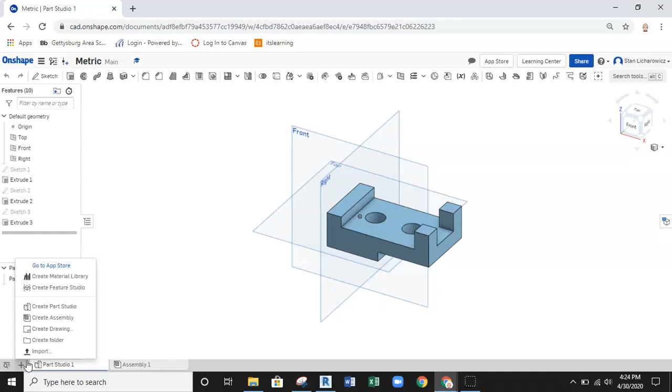All right, in this video we're going to discuss how to take this metric part and lay it out in a drawing. So what we're going to do is select the little plus symbol down in the bottom left hand corner and come up to create a drawing.

Now looking at these options, I'm going to go to ANSI drawings, and this says inch. We're generally running in inches. I could go to the ISO templates, but we're not finding any in here, so we're going to go back to ANSI, select the ANSI drawing, and say OK. Once we get into that ANSI inch drawing, I'll show you guys how to change the unit settings so you can have dimensions set up in millimeters.

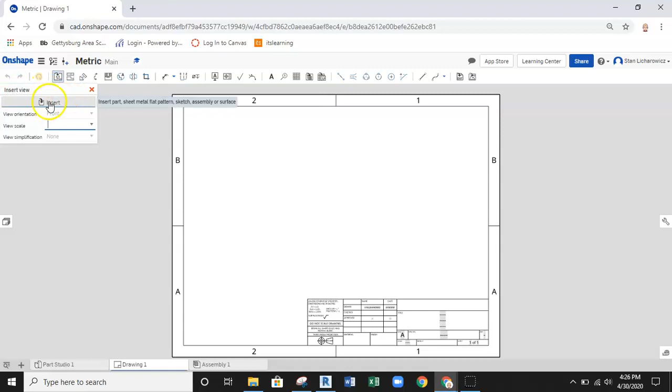Once that opens up, we need to actually get parts onto this drawing sheet. So with this setup, we'll say select part or assembly. If for some reason that disappears and it's not there, say you're on a new sheet, you can click this button, Insert View. Then it comes up to the Insert View dialog, we hit Insert View, and we can come up and find our parts.

Now, what I'm finding is that the easiest way to handle this is to create a single sheet per each drawing, and then submit PDFs or try to bind PDFs later with a PDF writer, and/or submit individual drawings. For now, at least, as I learned OnShape, and you learned OnShape as well.

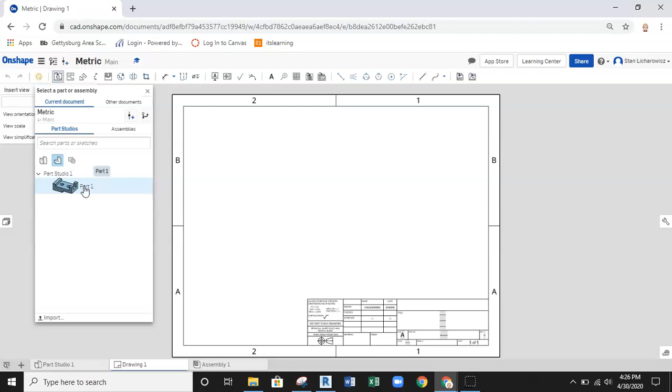So for now, we're going to go ahead and select our part. Right now it's set scale 1 to 2, and we actually want that to change. We want that to be 1 to 1. So we'll go into here and set this up because we want to go largest scale possible without losing detail off the pages, while still giving room for dimensions.

So we go ahead and set up these two views, that's going to be my front and my top. And then it's already set up here on my projected view, so I'm going to project from the front over to my right side view, and I have the 3 views that I need.

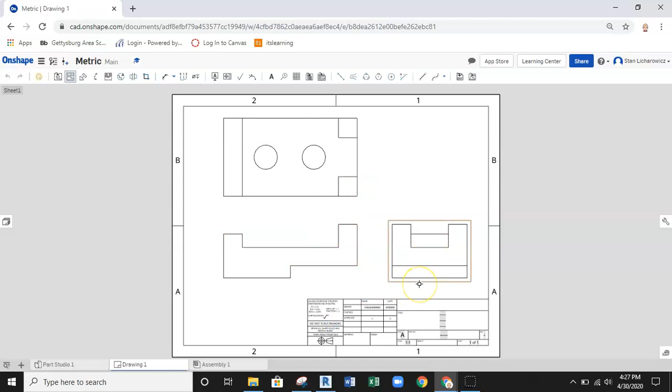Now, maybe it's me, but I like to open back up my sheets over here so I can see my part, my front, and my top, and my right being projected from that. Maybe that's just coming from Inventor and seeing my browser.

Next thing I'm looking at is I need to go ahead and turn on my hidden lines. Those have not been turned on. So I'm going to select the front view, and right click on that front view. Whoops, not sure what's happening. I'm going to hit escape here to finish that up. I guess I was still projecting. So hit escape to get out of commands, then right click on front view.

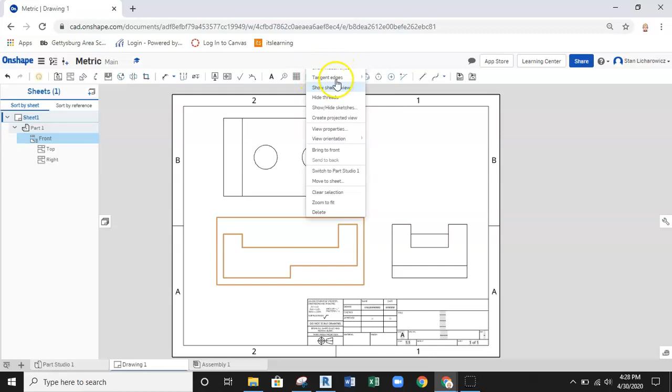Notice here this runs off the page. This at the top actually says show hidden lines, it's above tangent. So what I'm going to do is see if I can get this to happen again.

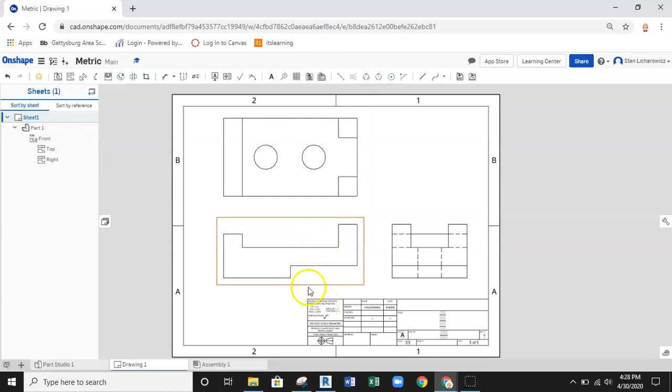If I right click on the right side view here, now you can see where show hidden lines is located. And if I select it, we should start to see hidden lines pop up. There they are. So just be aware that depending on where you are selecting, the right click option may not be seen, it might run up off the page. It's just something I figured out. So I go ahead and hit show hidden lines here. Same thing, show hidden lines. Now that came down and was able to select the hidden line. So that's set up, that's good.

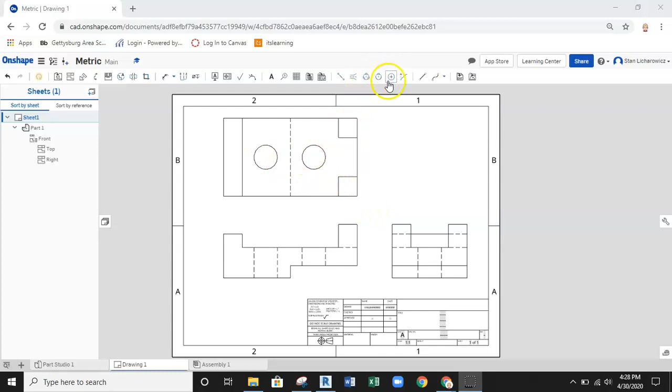So the next thing we need to do is add center marks. One of the other things I found out with the center mark tool is when you drop a center mark on the outside edge of a circle, you can see it only makes this small little center mark. Now, unfortunately, the other thing I found was there's no way to extend this, and no way to change the settings, from the research that I've done.

So what I found is what seems to be the industry practice is to find a 2-point center line here from the top bar, and then basically draw in 2 lines that are going to be the center mark lines for the circle.

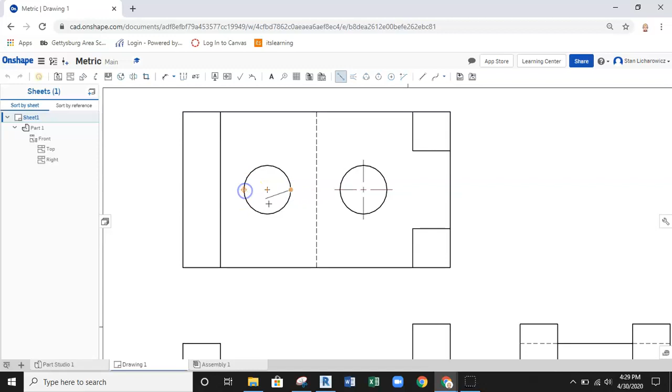So we still need to get this to extend past the edge of the object. I'm not going to get into measuring how far they're extending past the edge, but a center mark should extend past the edge of the object that it is marking. So that's the correct way to start your center marks.

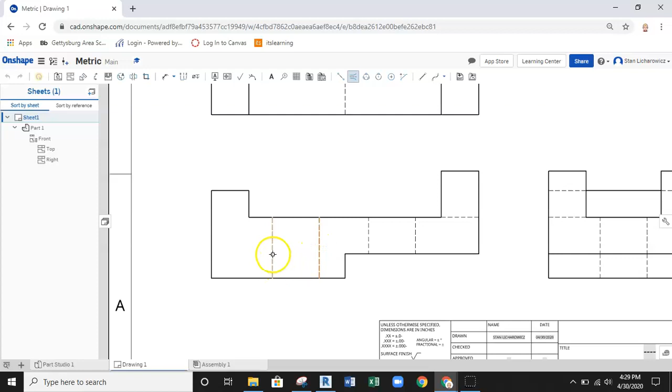Now as we come down here to do center lines on these holes, I'm going to go ahead and use the edge to edge center line tool. That's going to work in a very similar manner where it's going to drop a center line directly in between two hidden lines to create that center line. So with this particular feature, I'm probably going to center line both of these because the hole extends all the way down through the bottom.

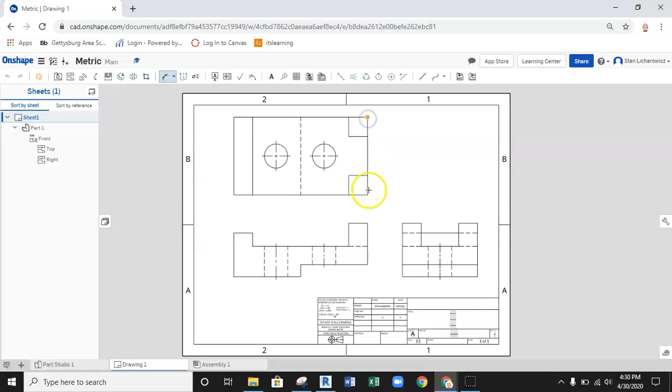Okay, so now we have our center lines and our center marks set. We're ready to start. So to start dimensioning, first thing I'm going to do before I change anything is go ahead and grab my dimension tool, and I'm just going to place one single dimension across this view and drop this in position. And what you'll see here right away, this is 2.52.

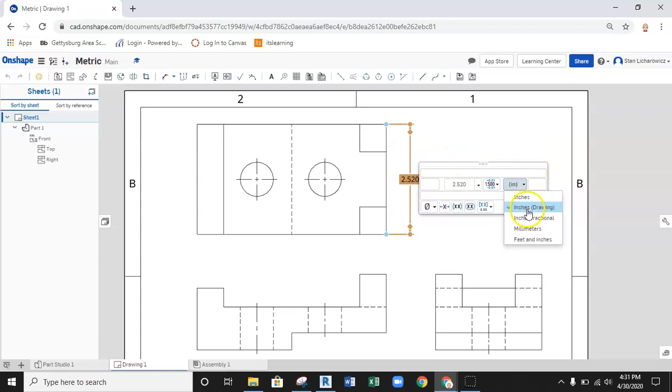This is not in millimeters. So the way to change this, you could actually go ahead and select each one and get into the properties of each one of these drawing notes. Not necessarily what I would recommend doing. Click, right click, edit, and come over and change this inch to millimeters. Now, this can be done, but it's going to be very time consuming with all your dimensions.

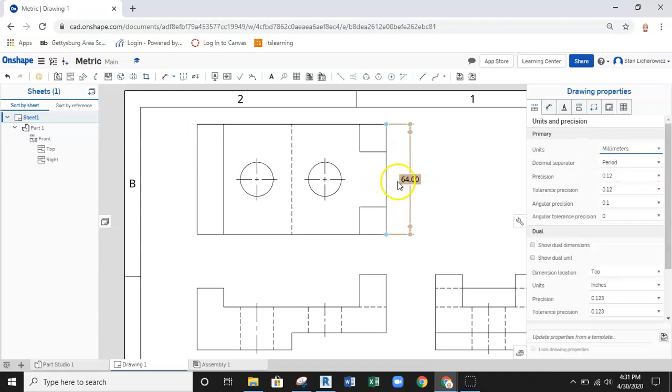This little wrench over here, the drawing properties, is where you can change the properties for the entire drawing. So with this setup, what you can do is come over here where it says units, you can pull down inches and change it to millimeters. With that setup, that changes immediately, and you can see 64 is the depth of this part. So with that set, we can continue to move through and start dimensioning the remainder of our part.

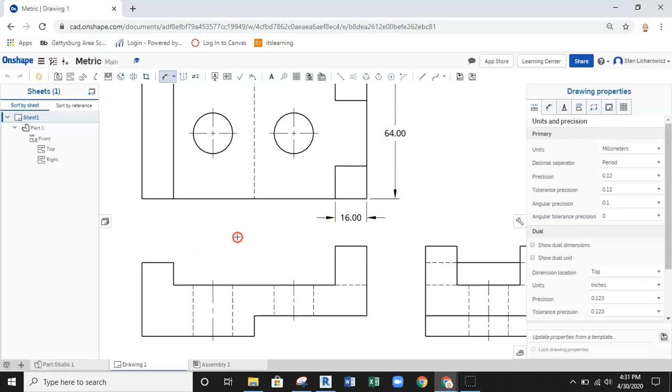So we're going to go ahead and start pulling dimensions across our drawing here, still remembering that what we want to do here is try to keep our dimensions in between the views. We really do not want to be sending dimensions all out into the outsides of these views. We want to keep them tight in between if we can. However, what we don't want to do is clutter these views more than they need to be.

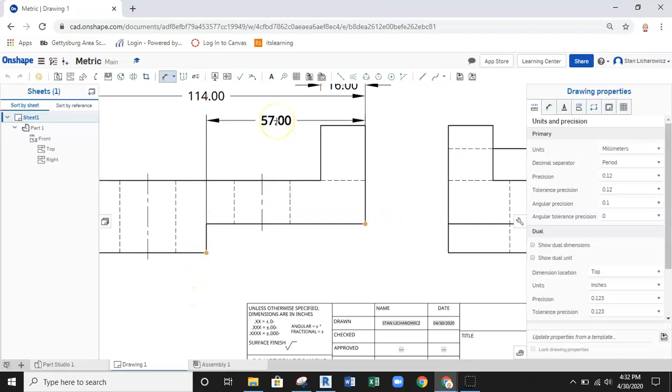So if I were going to pull this 57, that's running across the part here, probably better practice is to have 57 come down and actually drop this on the bottom of the part. Same way for this 16 millimeters coming across the side. Better to pull all the way across and keep it inside this part, pull it in between the views here.

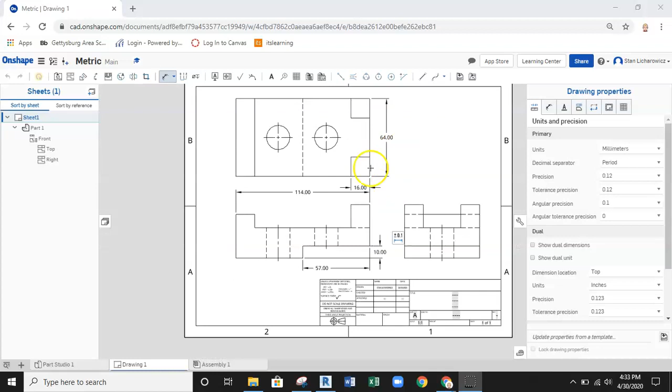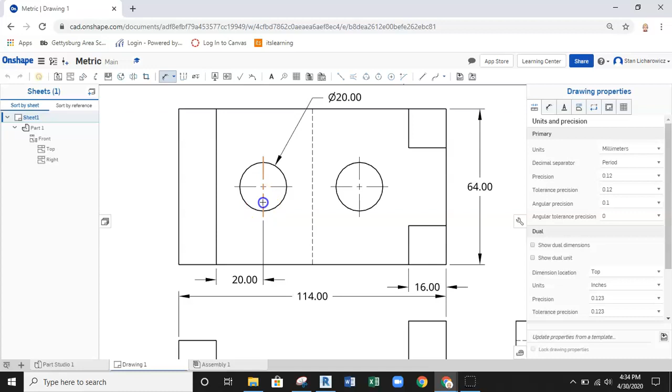So I'm going to go up and grab my dimension tool again, and now let's go ahead and dimension the diameters of these holes. We could go ahead and pull these up. We could also tuck these down here. But I'm going to just go ahead and pull this up top here to get this up out of the way, because I know that I'm probably going to need to pull some more dimensions down across the part. At least I'm going to have to give location information for these holes, and we'll go from center mark to center mark, and keeping these things down here is a great spot to put that.

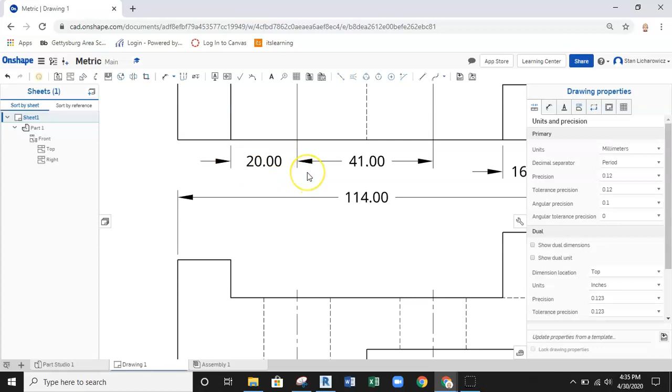Okay, looking at this dimension here, this 20 millimeters, you can see that it's running into its own arrow, or the arrow for the 41. We're going to go ahead and keep the 41. We're going to move this around a little bit, and the arrows do tend to clean themselves up a little bit. So don't be afraid to drag your dimensions around to try to get things to clean up and be a little more tidy.

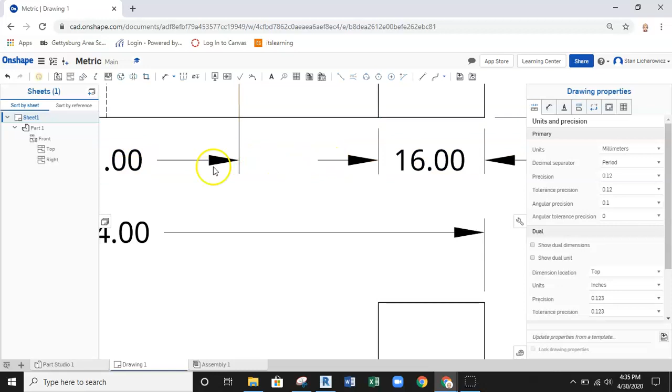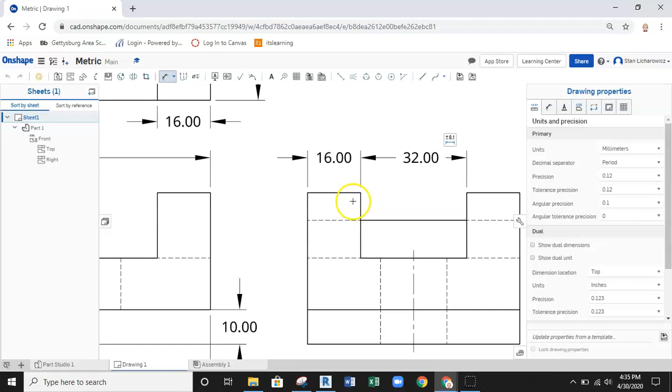You can also see, if I zoom in closely, to get them to line up. As I move this 16 back up, you're going to see a small, well, maybe a very small dotted line that'll show up here to help align your dimensions. You have to be very careful and specific when doing that to see that. So I'll go ahead and continue to dimension this part, grabbing the different sizes as needed here and positioning those. That little dotted line does pop up, and it does become a little more noticeable the more you run the software.

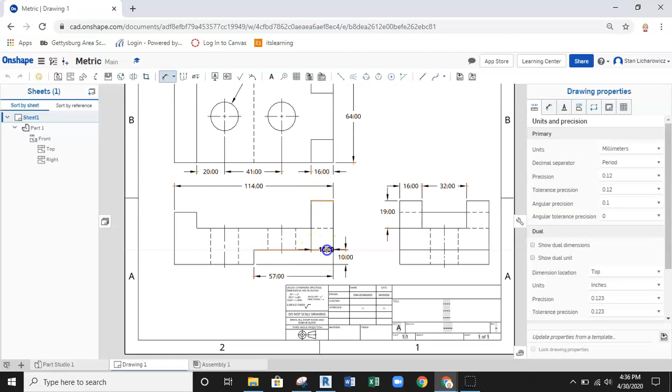So what I'm finding is I like OnShape. I don't necessarily like some of the lagginess that occurs, just because it's a web-based system. But it does seem to work quite well for what it is we're doing right now, being a remote classroom. So it's definitely working out.

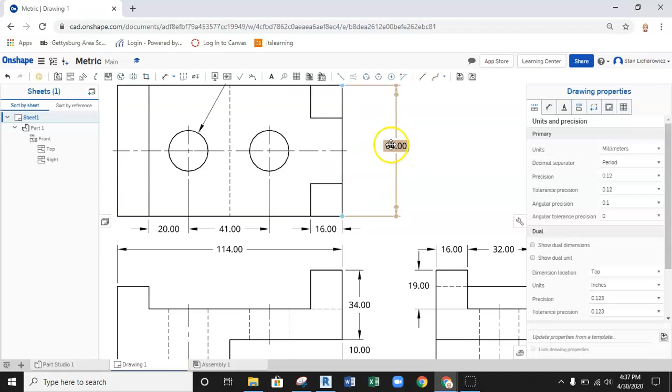Okay, I'm going to go ahead and add a few more dimensions here. Pull this out a little bit because I need to let this be set up. Now this part is symmetrical, so what I could really do is set up a center line that's going to run directly down through all these parts, and then I know these run right down through the center. I don't need to give any more dimensional information on the location of those holes.

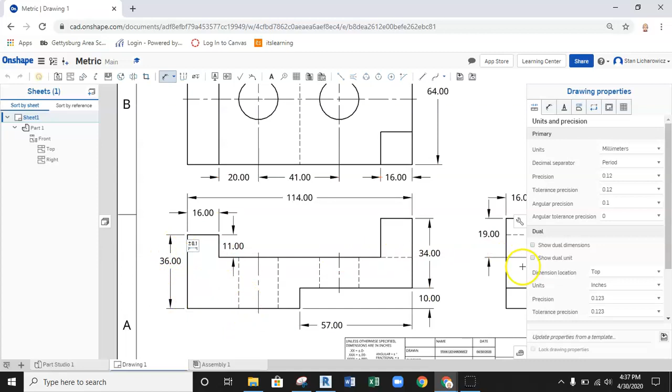So a few more little dimensions I'll place on here, and then we'll talk about how to PDF this and how to get this submitted. Now if I were to pull 11 across here, not bad practice, but I can also place it inside the part. It's a nice clean dimension area to do so. So we'll go ahead and drop 36 out because it'd be easier to do this than pull it all the way across the part again.

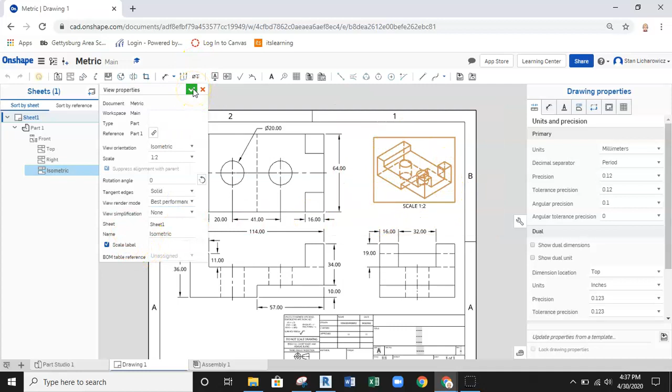All right, so with this dimension, this is probably pretty close to being set. Let's go ahead and see here, if I were to do a projected view of my front over here to the isometric view, obviously that one-to-one's not going to fit. But could we go ahead and set this up to change these view properties to make this say a 1 to 2 scale, and set that up so we can have an isometric view right now. We'll go ahead and hit that green check, so we can see that isometric.

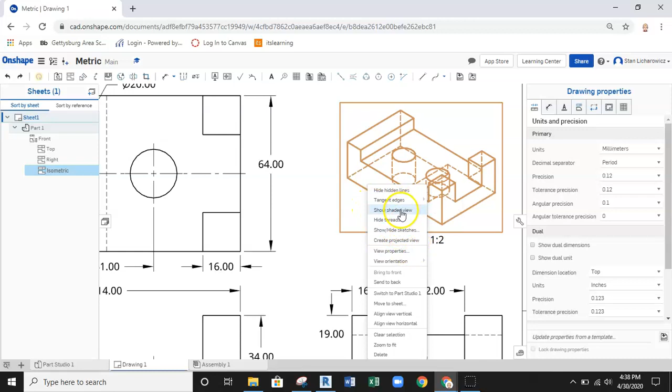Now you see the hidden line showing up behind here. This is really more of a wireframe. If we were to make this a solid, you can select the view, right click on the view, and come down and hit show... wait, where is that... show shaded view. When you click on shaded view, you get a shaded view of the part. Still hidden lines are showing. Again, we could go in and toggle off the hidden lines so we can see that as a solid. So that's nice and clean, and this is ready to go ahead in PDF.

So setting up a PDF is pretty simple. Down here we have the Part Studio, the drawing, and an assembly file. Right now we're in this drawing file. I'm going to just right click on that drawing file and hit export. Now the name of the file, I'm going to go ahead and change this. Right now I'm just going to call this metric part.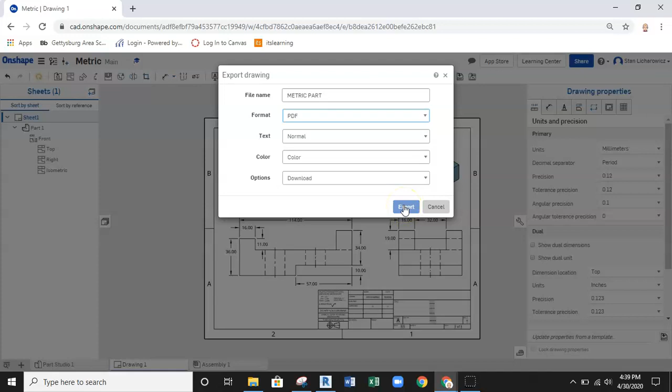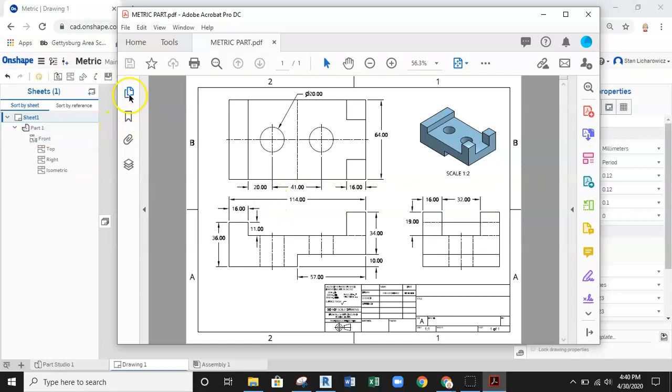So my metric part pops right up as a PDF. And now I'm ready to have a PDF writer. What I can do is just continue to PDF parts, layout parts, PDF them, and then I can go ahead and bind them together in the Combine Files tab, which we've done before. If that is something you do not have as a PDF writer, just go ahead and submit the sheet separately. There is a way that you can start working through that.

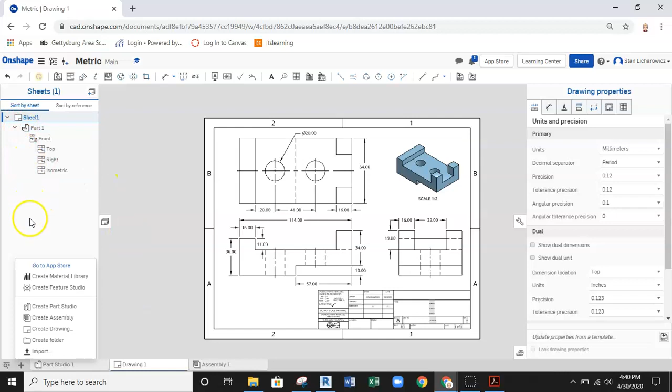Onshape, when you want to go ahead and start adding additional sheets, that is an option here, yet I found that it could be a little bit more confusing to deal with adding additional sheets. When you do add an additional sheet, that sheet does pop up. The title block is not the same because this is an ANSI specific title block that does not give all the information from the front cover sheet that you see here. So it's a little different. The other thing that occurs is that you need to save versions in order to pull parts onto that cover sheet. So what I'll do is, when we get into further sheet sets, we'll jump into that a little bit further, especially as I learn Onshape more and more.

All right, so hopefully this gets you through this first assignment, and we can continue to explore Onshape together.